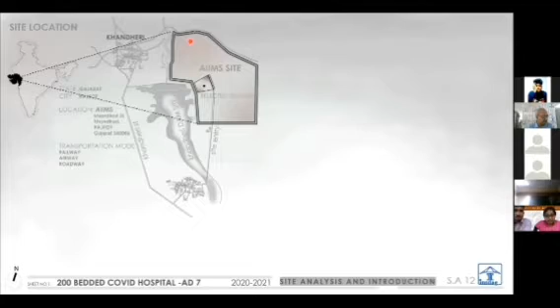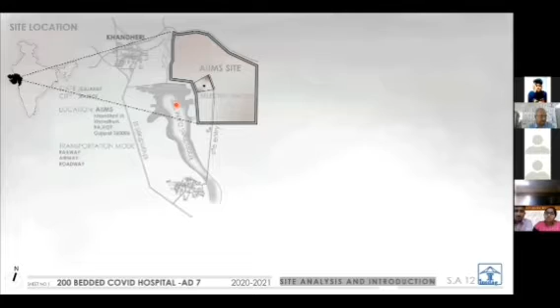There is an overall setback of 30 meters from the AIIMS site boundary to protect it from flooding of the Khandheri dam. Coming to utilities, in a radius of 2 to 3 kilometers around the site there's a sewage treatment plant, a water pump station, and a water power plant. One issue identified was a lack of sanitary landfills.

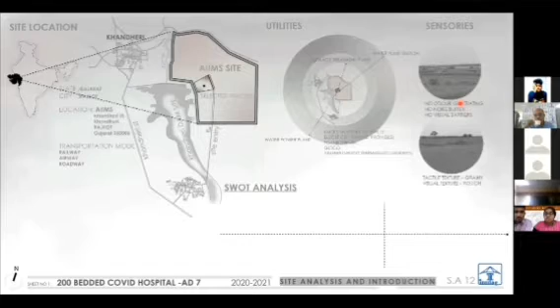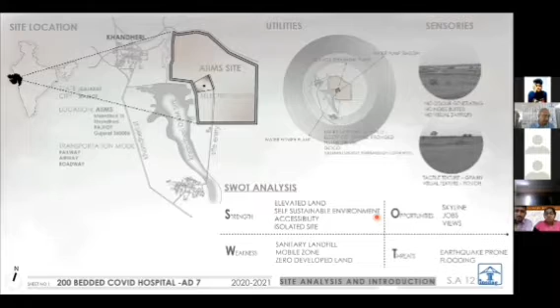These were the sensories we observed. Coming to the SWOT analysis: strengths are elevated land, self-sustainable environment, accessibility, and isolated site. Opportunities were skyline, jobs, and views. Weaknesses were sanitary landfill, mobile zone, and zero development. Threats were earthquake and flooding.

Coming to the site analysis of our 10 acres, it is 30 meters away from the Khandheri Lake, with a 5 meter setback throughout the periphery of the site.

Coming to sun path and wind path, the blocks were arranged so the wind path creates a tunnel effect, and the taller blocks act as a barrier to the sun for the lower heighted blocks. The sound produced from the huge water body was a positive impact from the surrounding environment.

The circulation is designed in terms of public entry, private entry, service entry, and fire norms. The landscaping is done with a combination of hardscape and softscape to create a balanced environment.

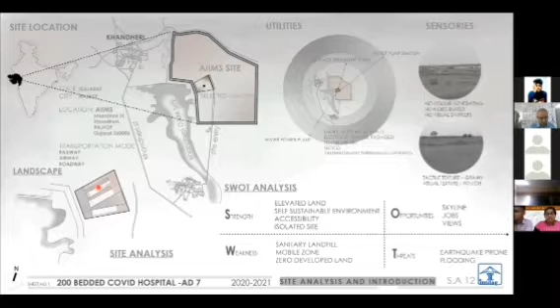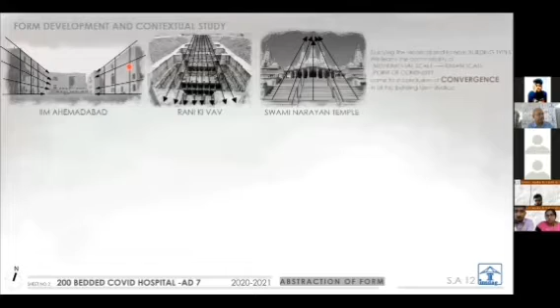Coming to the concept, in this slide we'll talk about the abstraction of form, explaining the form development and contextual study, studying historical and architectural wonders such as IIM Ahmedabad, Rani Ki Vav and Swami Narayan Temple. We learned the commonality of monumental scale to human scale and point of continuity.

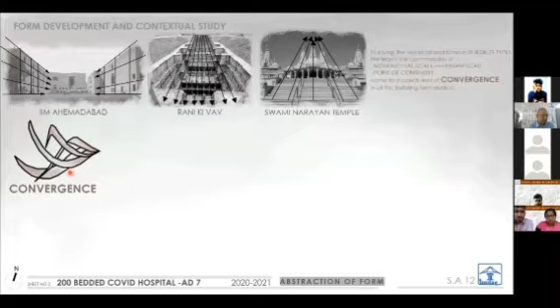We came to a conclusion of the word convergence across all the building forms studied, and pictorially represented the convergence through a sketch. Next, minimalizing the abstracted sketch.

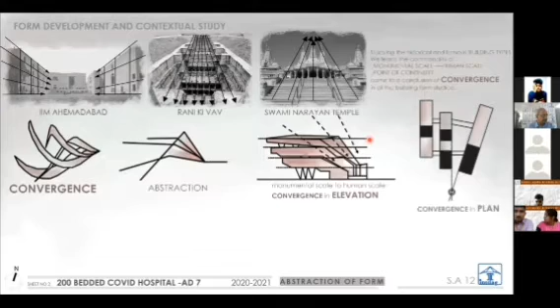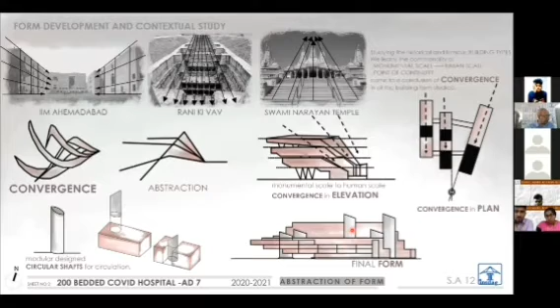Using the monumental scale to human scale convergence in elevation as well as in plan, to stabilize the form we introduced circular shafts by breaking the blocks into half. This is the final form we expected to perceive.

Coming to the design features, we played with the building form using sun path, sun rays and shadows, tunneling effect, and orientation of the site. Next was levels, segregation and interactive pockets, self-sustainable design, connectivity, and modular planning.

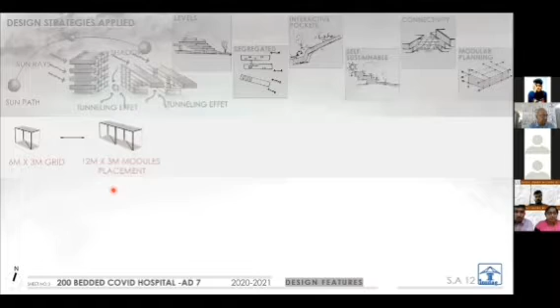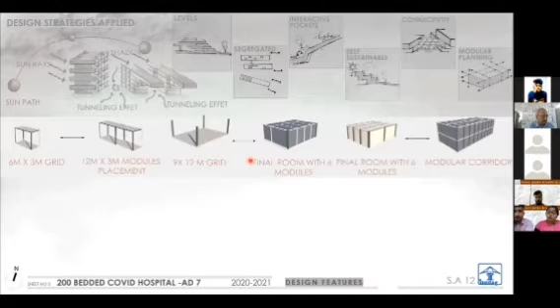Since we chose modular planning as our strategy for fast construction, the grid dimension considered according to medical standards was 3 meters by 6 meters, which we multiplied into many varieties to obtain rooms and achieve our design, from corridors to washrooms to surgery rooms. We applied this grid throughout our design to ensure an easy and fast construction process. These are a few varieties and possibilities of modules using the single 6 meter by 3 meter unit.

In this slide we'll speak about the site plan and site section. Coming to the zoning, we have zoned each block to match the concept of convergence in plan. Other than the blocks, we have zoned our services and areas for future development as shown in the figure, with separate dedicated visitors parking, ambulance parking, and staff parking.

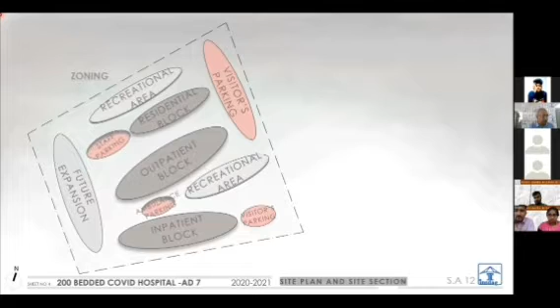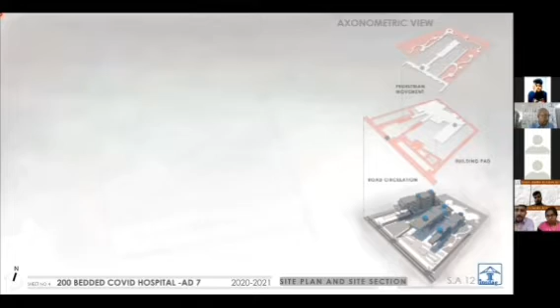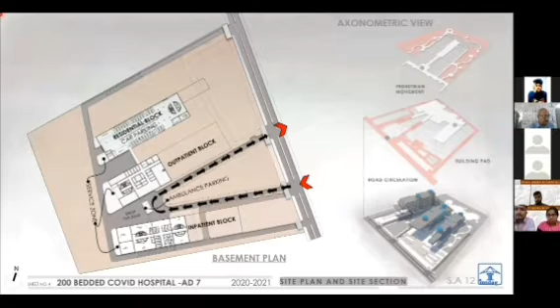This is the ambulance vehicular path, and the next is the service entry and the staff parking driveway. Observing the arrow directing, we can observe how each block and the services are interconnected to run a smooth function.

This is our ground floor plan, showing how pedestrian movement happens to the site, and also how the vehicular movement happens for the visitors parking and the inpatient parking at the ground floor level. The arrow movement directing shows the complete visitors parking and inpatient parking, and how it is segregated in the site plan.

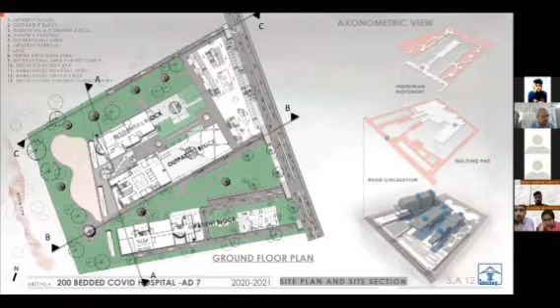We can see how pedestrian movement happens through the site, and also observe the landscape, how the softscape and hardscape area with the water body makes the place livelier for residents and visitors to enjoy.

These are the site sections showing the levels played in each block with underground interconnection as explained earlier, and it also proves the word convergence in elevation as per our concept.

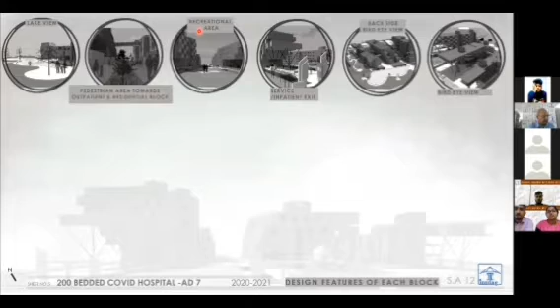This is the service and inpatient exit. This is the back side of the bird's eye view, and this is the front side of the bird's eye view. Next, coming to explain each block and their features.

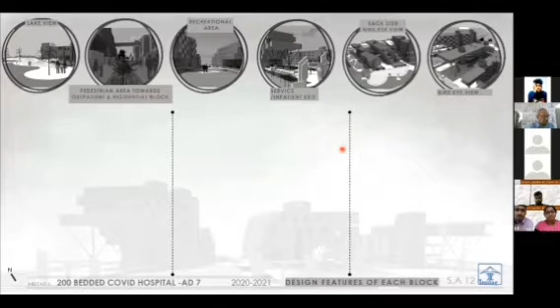First is our inpatient block, which is the COVID block, a 200 bedded block. Since it is a COVID block, it is an isolated block with demarked entries. We have also applied a negative pressure system in our planning only for this block.

We have divided the corridors into 3 parts, where the center is a medical corridor, and both the other sides are patient corridors, providing access for only patients on either side, while the center provides access for medical staff.

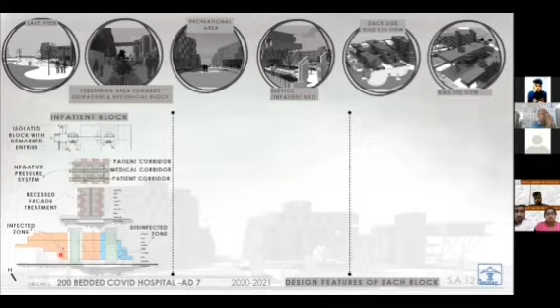Next, coming to the section, we have divided it into 2 parts: an infected zone and a disinfected zone. The infected zone is for COVID patients, and the disinfected zone is for medical staff.

They have their own circulation shafts, which they use for their own circulation and movement within the building.

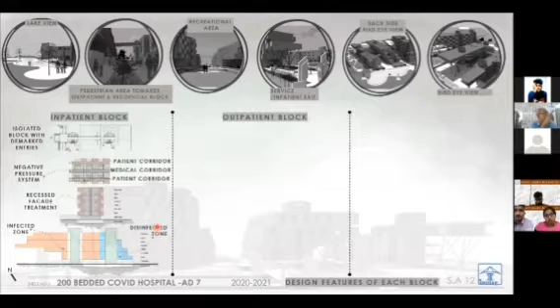Next, coming to the outpatient block. Since this is a vast block, we also had to explain how our 6x3 grid works.

This is how the modular grid planning was done. We have added the 6x3 grid everywhere and tried to combine it into one room.

We haven't used a negative pressure system in the outpatient block. We have tried to use more open spaces and closed space planning here, so that proper natural ventilation is available. Next, floor to floor connectivity.

Since this block is quite vast, it's not necessary for doctors to always enter through the building. They can use the outer facade and enter each floor like this.

We have also divided the entire section into zones: the emergency floor, administrative floor, diagnostic floor, surgical floors, and the research facility which we have added.

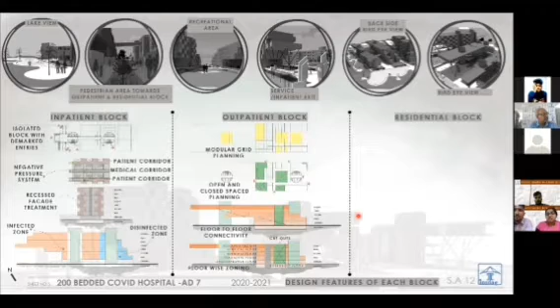Since it's residential, the occupants can't always feel that they're staying in a hospital area. So we have provided specific courtyards for each house, giving them their own specified space to enjoy.

Next, how are the doctors going to commute? It's not necessary that they have to get out of the building and go around, so we have provided connectivity even in the air and underground.

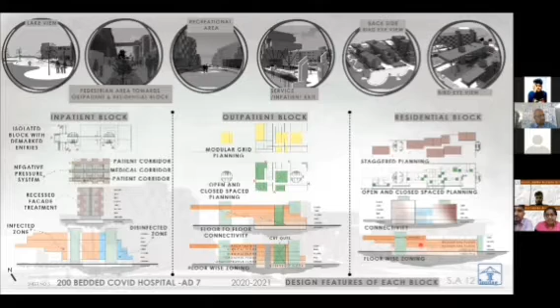Next, floor-wise zoning is also done here, which is hostel, residence, and services, and basement parking for the staff.

Coming to the inpatient block, it consists of G+7 floors, excluding the basement. The basement floor is the emergency and service floor, which consists of triage, examination, research, and surgery rooms, mortuary, and other service units placed in a sterilized zone.

The basement has two entries: one is the ambulance entry and the other is the service entry. The ground floor consists of a testing unit, family meeting unit, drugstore, record room, laundry services and dietary services.

Then comes the typical floor, consisting of a cluster of 3x6 meter modules, which we have segregated into two zones: one is the heavily contaminated zone, which comes under the patient corridor and wards, and the other is the clean area, which is indirectly connected to the patient wards through the medical corridor with the needed services to function.

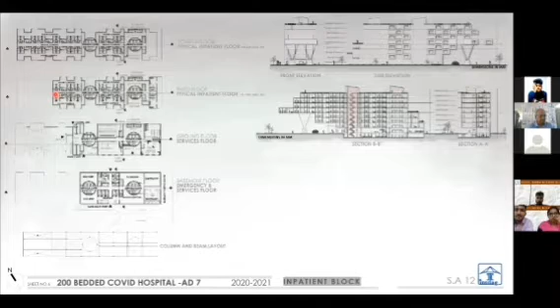These are the elevations, as you see, elevation and section, showing how the inpatient block looks from the side.

Then coming to the cluster plan, here the 3x6 module is placed in such a way as to play in the elevation facade and create a courtyard using each cluster.

The main thing here is that we have adopted a negative pressure system, incorporated in our inpatient block, to cancel the cross-air contamination mainly.

Then these are the testing unit and the family unit, where people come and get tested, and where the patient's family comes and meets the patient, so as not to hurt the psychology of people thinking that they're staying in a COVID hospital.

Okay, coming to the outpatient block. The outpatient block consists of G+4 floors with basement, with an overall height of 25.2 meters. The basement floor is an emergency floor and service floor.

The ground floor is the admin and clinical floor. The first floor is the diagnostic floor. The second and third floors are the typical surgical floor. The fourth floor is a research facility for the students and residents who come to study here.

The floor above the surgery room is connected and double-heighted, so that it acts as a viewing deck for the students to study from the research facility. This is an added feature.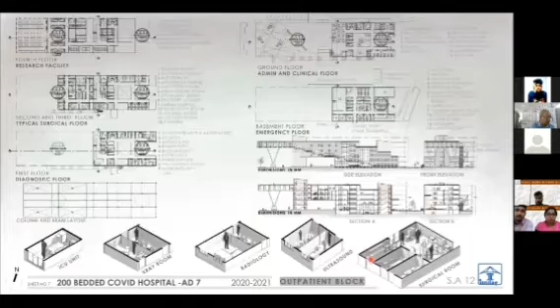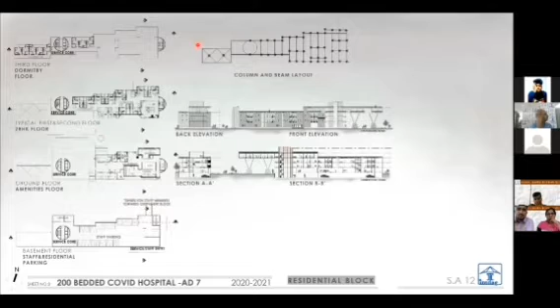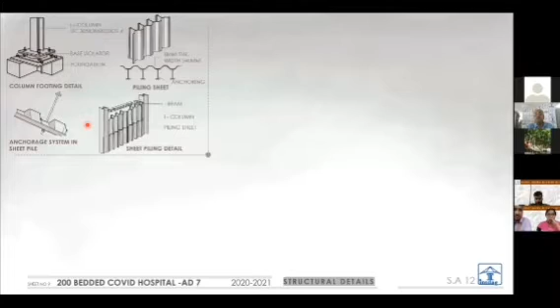As our site falls near Khanderi Dam, we use the sheet piling technique in our basements, which acts as retaining walls that resist the lateral earth load, water, and other filling materials.

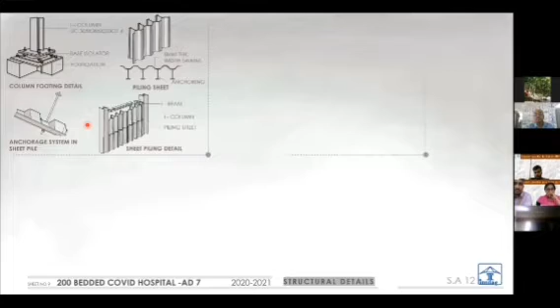To maintain structural connectivity, we have used bolted I column and I beam as shown in the image, since it can be easily developed and dismantled.

With the implementation of modern technology, we have used photovoltaic film in the inpatient block, since we have used a negative pressure system, to support proper lighting and ventilation, and it is energy efficient too.

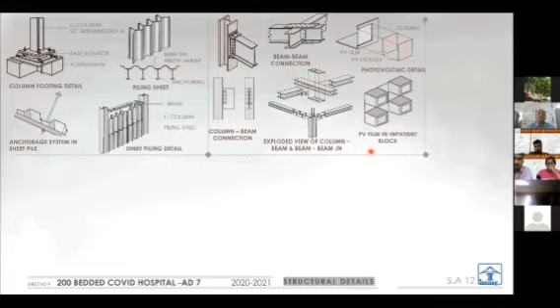The material used for floor, wall, and roof is a B-core slab, which is a solid structure sandwiched between steel plates braced together with an array of thin core tubes by a procedure of copper brazing. Also, the ductility of stainless steel can effectively resist earthquakes and land subsidence.

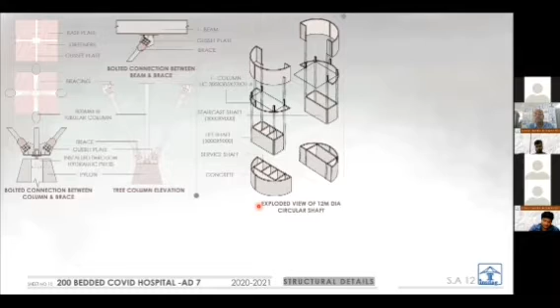As we see in many buildings, the structural part itself hinders the aesthetic part of the building. So we thought of managing both the structural and aesthetical appearance using this tree column.

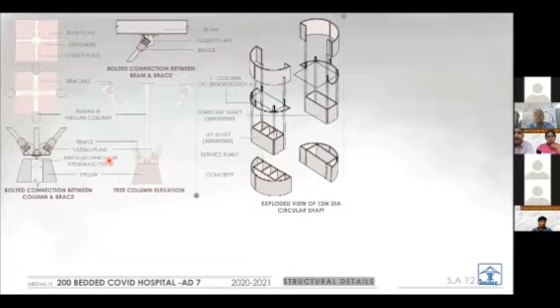The tree column, which balances symmetrically on 4 ways to support the structure with a diameter of 800 mm, is connected to a brace which withholds the gusset plate and the base plate using the stiffeners. Then this column is installed through a hydraulic press to a pylon.

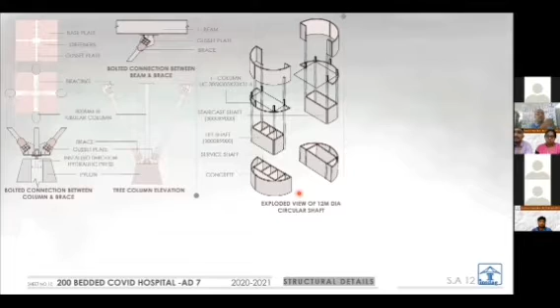Coming to the exploded view of the 12 meter circular shaft, it contains the I column, staircase shaft, lift shaft, and service shaft. The reason this element is introduced is to enhance the balance link between structural and aesthetical features, making it functional.

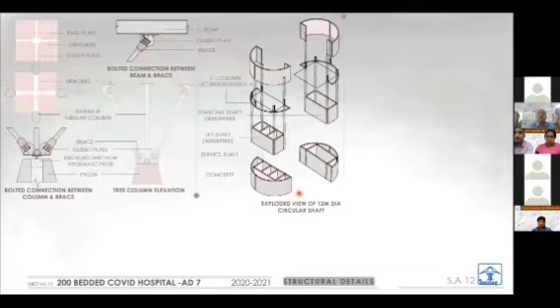As we observe, this structural element is used as a pedestrian movement between the residential and the outpatient block using cross bracing between two I girders for the steel decking with the help of steel joists below.

Then coming to the main topic, timeline of the work. First, we go with the site excavation. Then we do our formwork according to our grid to place the module. After the formwork is done, then comes the transportation of our module from the factory to the site.

After that, according to the grid alignment, 25 modules are placed. Then our final building ends with services. And next, these are the days which each construction phase will take throughout the site.

We come to the end of this one. So now we will start our video walkthrough.

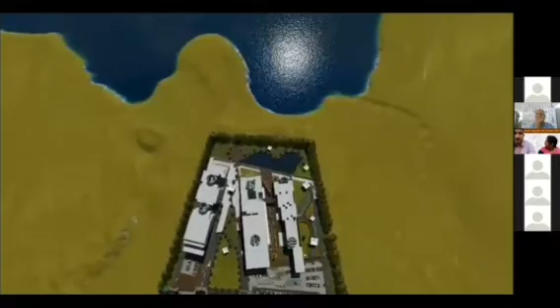Thank you. Thank you, sir.

Thank you. I think there are many questions regarding structural aspects and structural stability, which I presume. So I would request Mr. Bhattacharya to start the questions.

Mr. Bhattacharya, please. Look-wise, it was quite appealing. And the use of the initial concept, how it has been made, made certain impact on me. So I liked it. And definitely,

your idea of 6 meter by 3 meter prefabricated modules, etc., is quite nice. But creating that sort of hanging or overhang and cantilevered parts from a structural point of view needs certain other considerations also.

At this moment I would say, as a conceptual thing, it showed nice looking, but there can need to be certain thoughts to be added.

Yes, sir. For adding that, we have used a circular shear shaft for horizontal stability. The circular shaft, etc., will be taking whatever earthquake forces come, etc.

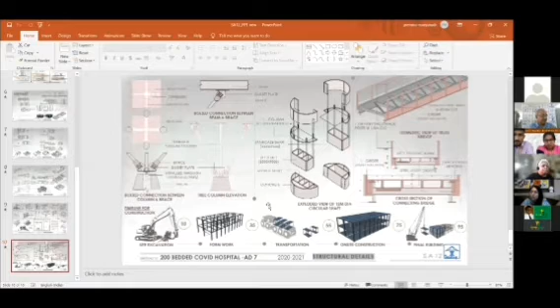You have considered, you've done that site analysis, you've taken into consideration the climatic issues, and then you have also separated out the vehicular and the pedestrian, right? Yes ma'am. I think also maybe 2 or 3 days back I saw this, but now it is detailed out.

All the considerations have been taken, and even the landscape. I liked your vehicular and pedestrian separation, which was missing in many other presentations, though of course others had it too. One thing you have elaborated in your concept is that it is converging, right?

Yes ma'am, convergence. So where is your convergence in your site? Like, are you converging towards the water body? Yes ma'am.

Nice planning - that means it is in the planning, and in the elevation also. And the form is also converging towards that water body, right?

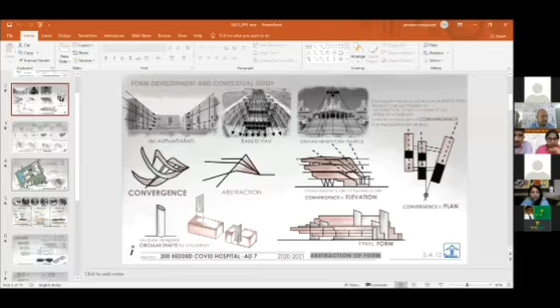Yes ma'am. Fine. Now I just want to say, in your planning - can you show the master plan? Here there is a water body, right?

Now we all want to take best advantage out of it. Like, I don't know, it is all set up in a longitudinal way from the water body I'm talking about - your linear part is not facing the water body, right?

Of course you have done that convergence and everything towards the water body, but if you imagine, if you provide the rooms of the patients who would like to see the water, that you could take as an advantage - that maybe you are missing out. Because staggering and all is given, ma'am.

When it comes to a design feature, ma'am, you can see the recess here in the facade - the recessed facades are at an angle. So we have seen it from the building point of view.

What I mean to say is, if you could have tilted it, I would like to see the patient's blocks and all facing the water body. It would have been nicer. That's what I mean to say.

You could have taken that into advantage. Of course you have taken many other considerations, but that part is, I feel, you could have done that also. Ma'am, sorry to interrupt.

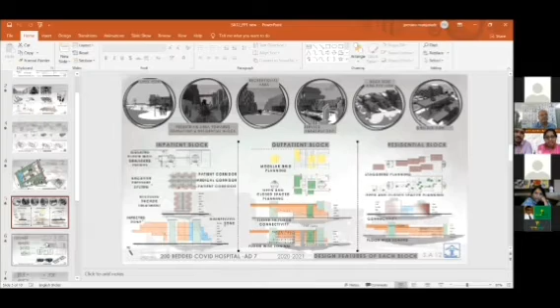That's okay, now that master plan, yeah I understand, the master plan you just showed. So here, where are the patient's cabins? Tell me in this form, where is the inpatient part? Yeah, this side is the patient's part, and this is the doctor's facility.

You've separated the corridors also? Yes ma'am, separated, right? So that's what I'm saying - if it's possible, like if you have done it in terraces, maybe in an inclined way as convergence, so that you should be able to see this also. Slightly tilting, thought about that would have maybe helped a bit. So that is one thing.

So this is a negative pressure system, only these ducts. What I mean to say is, here there is a staircase. Yes ma'am, there is a staircase here. Is staircase pressurization also given even there? We have given staircase pressurization, and fire safety shafts have mechanically ventilated, right? Yes ma'am, the staircase.

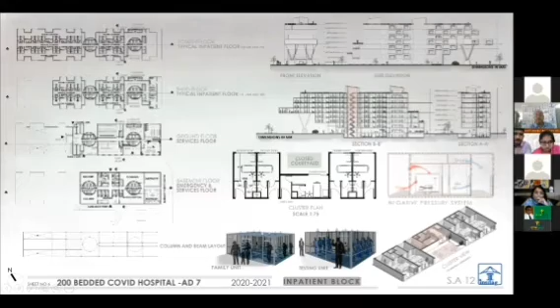This is the way it looks ma'am, this is the cluster. Yeah, the cluster is there, that is fine, that is okay. But I'm talking about the major planning where I saw maybe these rooms, the corridors. See, medical corridor is here, and these will be ventilated.

What about the negative pressure system that's been added? Negative pressure system, and we have also given photovoltaic cells which will block the harsh sunlight and help protect us from extra heat, utilizing the technology. We were trying to utilize the technology because we can't provide open and closed windows with negative pressure system, so we implemented photovoltaic cells.

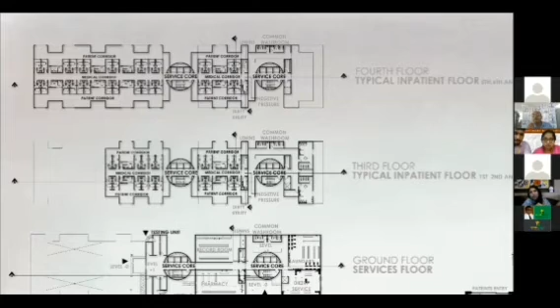And what about those masses coming out in your form, you have provided, right? This one ma'am, in that bit, where is this one? Yeah, recessed ma'am, any purpose for that? As we see in design features, this is the push and pull that we were discussing, achieved by using clusters. You can see it in this section over here, the way the lighting will come in and go out.

Ma'am, why did we do that? We see many buildings using the structural part itself that hinders the complete building concept. So we thought of using the tree column, but the tree column itself acts as an architectural element along with the structural element. This is what we conveyed, ma'am.

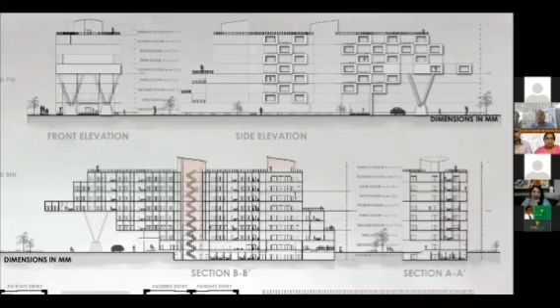So otherwise, I think that's it. Okay. Fine. Thank you, ma'am.

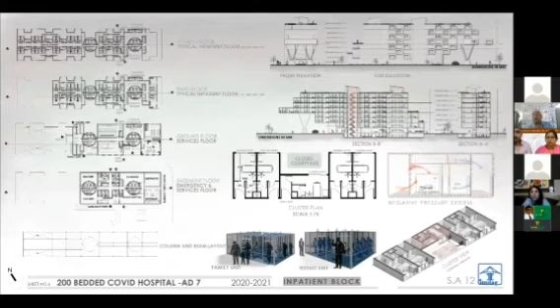Before we go to the next jury, about architect Sukarna Dasgupta, she is a practicing architect, co-founder and principal of Sukarna and Associates, and lead designer of the practice. Her office is in Calcutta. She is from Jadavpur University, a member of COA, member of Indian Institute of Architects, and member of IGBC, Indian Green Building Council accredited professional. Her work has been exhibited in important institutions in India and Bangladesh. She has collaborated with architects from India, Singapore, Bangladesh and USA. Sukarna and Associates have undertaken projects that impact local communities and urban spaces across India and Bangladesh for the past 25 years. The basic outlining goal of the office is to create design in harmony with environment and life, aesthetics and engineering fine-tuned with functions and environment, leading to meaningful architecture that stands the test of time and elevates the standards of life. This is, in short, what we can say about architect Sukarna Dasgupta.

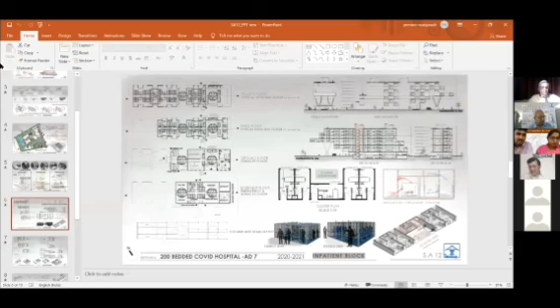Kindly explain a little bit about your residential blocks. How far is it necessary to have a residential block, and that too in such close proximity? My question is very specific: what have you thought of the family members of the health workers? They will be there in the campus, and they would likely want to have a space between the medical services and their personal life. So how are you separating them out?

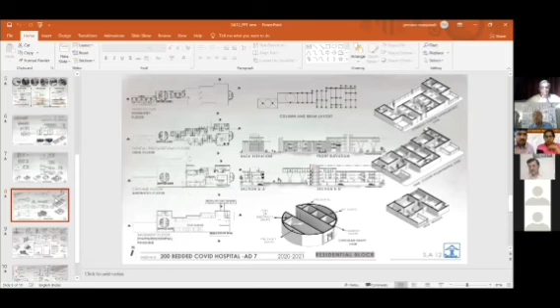Yes sir, when we see the master plan, sir, we can see the residential block is placed at this point. So we have created a recreation area for the residential block because there will be children there, and there should be no stereotype for them. So we have created a recreation area, as we see in our video too, given at this point and even at this point also. So we have tried to segregate it, pushing the residential block apart and giving more space for them to enjoy, with a pedestrian walkway for morning or evening time.

Also, to keep it separate, we have provided our inpatient block towards the far end, and there's no connection between inpatient and outpatient because they have their own parking and their own vehicular movement, entirely for them. For residents, they have their own entry and their own segregated parking. That is how we tried to completely demarcate it. Thank you, sir.

Thank you, Dr. Sarkar. Now, sir, Dr. Krishna. Yeah, I have no comments to make, only some observations.